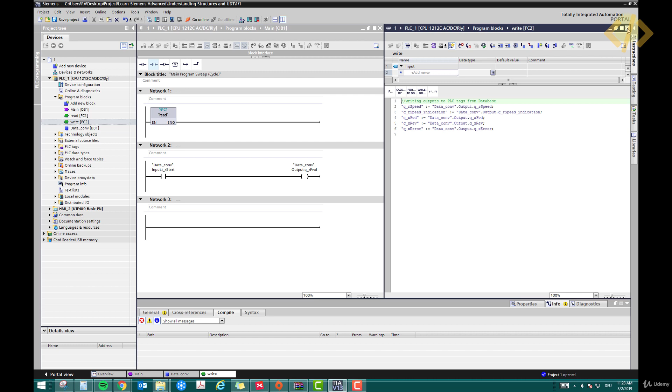So if I go to the read function inside, I don't need the write function because we are just reading it. Delete it and close it. Similarly for the write function, don't read the inputs, just delete these. So we have individual read and write. This one is just reading the data, and this one is writing the data.

So I will just drag this right here. Now this makes more sense. First we are reading the inputs, solving the logic, and writing the outputs.

All right, now coming back to our data conveyor DB. In this DB, I would like to add more information. We have written for inputs and outputs, but let's put some more information which would be quite interesting. So I will add a row and I will write here parameters.

And in the parameter, I will make it again a structure. Now what is this parameter? Okay, this should not be like this. Wait a second, because this becomes output. Hold on, let me delete this. And now, yeah, now it's better. Parameters, now it's a structure.

Now, what could be the parameters in a conveyor? It can be the motor on time, conveyor on time or off time, or it can be the speed. These are the three parameters which I see in the conveyor we have in FactoryIO. So I will start with on time, which is my input, and that's integer. So I will type 'on time'.

And the data type for on time, I would prefer to mention the on and off time in percentage. It would be in percentage, so I will take integer from 0 to 100. Similarly, we have off time in integer, so write off time, that's also an integer. And the third parameter I see could be the speed, that will also be in percentage. So again, integer. So all these three values are in percentage, so I prefer to take integer as a data type.

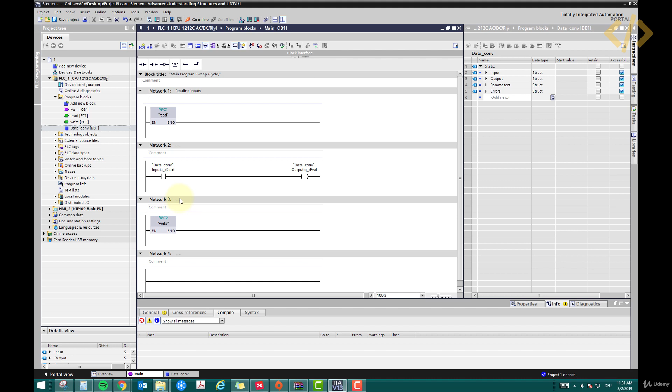Now one more thing we will do in this video. You can see that in the main program I have started writing the ladder logic in network 2. Let me just put some comments: reading inputs, writing outputs, and here is, let's say, the conveyor logic.

Now if I started writing here the conveyor logic for interlocking, for moving the speed, for showing the errors, it will be like so many ladders here, you know what I mean?

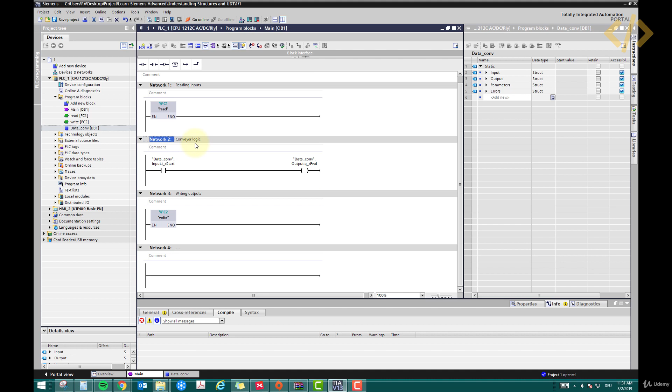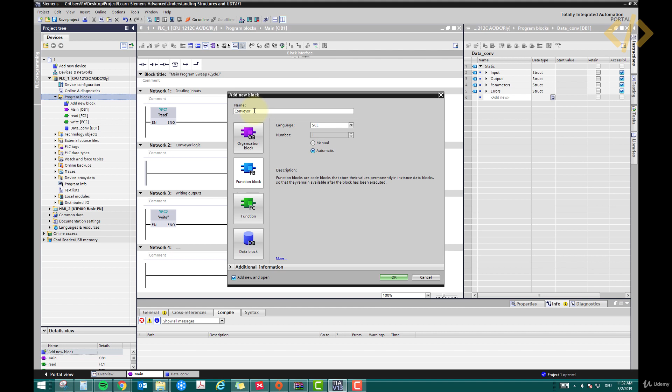So I want this network to be only for the conveyor logic, just to make clean programming. So instead of writing the logic here, I will make another function, or I can also make a functional block instead of a function. So I would prefer a new block, let's take a functional block.

This would be an extra block which we have only for conveyor, and let's try to program it in FBD. So I have conveyor FB here now. This I would like to move here. This I prefer for clean programming, because we know we are reading the inputs in the first network, we have logic in the second network, and then we are writing the outputs.

And now inside this DB you can do whatever you want. Sorry, inside the FB. So this is the FB. Here we can write the logic. All the logic which we write here will automatically be inside this one, and this will be executed after reading the inputs.

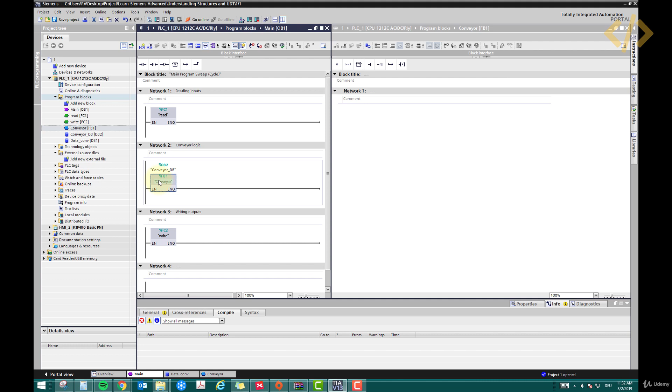Let's say we want to just make a demo. So I need to start my Factory IO. Suppose we just want to start and stop the conveyor using the start stop push buttons. So let me open the scene which I made already.

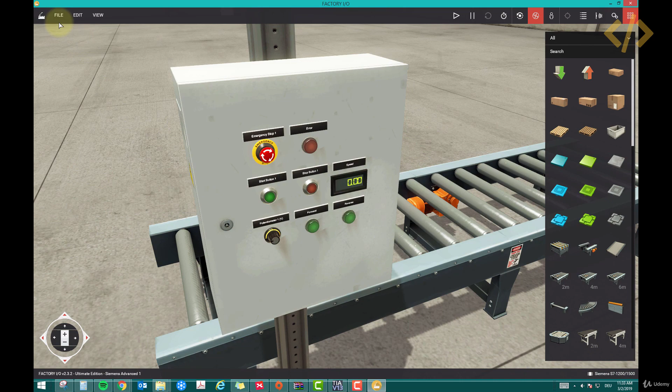Let me Google it, where is that? Academy, Siemens Advanced, somewhere, yep this one. So let me go back to the drivers. We have start button at I0.0, stop in here. Okay, this is the correct logic.

So now we open the DB again, because our inputs and outputs are here. One more thing, if you don't know, if you take an FB, it has a dedicated DB inside it. This comes automatically because FB stores the value and FC doesn't store the value. That's the reason FB has its own DB, FC does not have. So this DB comes automatically when you take an FB.

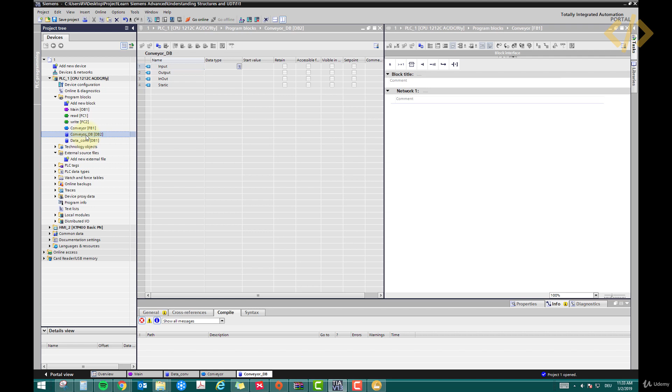But we will go to the conveyor data. So we need to latch the output. I will see what instructions I have, so let's just take an SR flip-flop.

Now what is going to set the output? My input, which is the start button. This is going to set my output, which comes here. In this case we have only analog control, so if you see here, it's forward, reverse, and error. These are the indicators, and we have the speed here in QD 100.

So what I'm going to do is I will take a memory bit, just for the sake of explanation, which can be called the start bit. So here, if you see the block in the input, I will take start bit.

Sorry, it is not the input, this is my static start bit, because this start bit I'm going to latch, and this start bit is going to move the speed into the conveyor. So I will explain how.

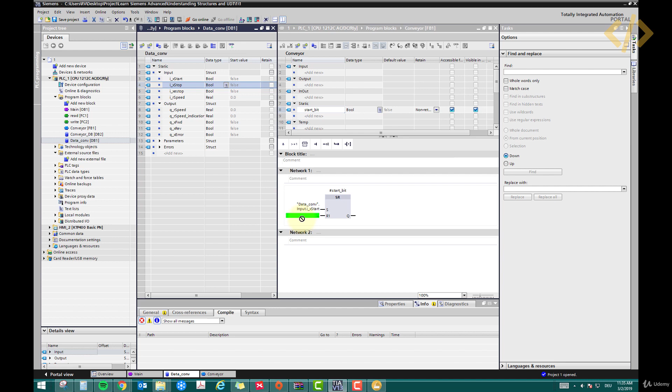So we have the start bit here, so I can take the start bit here. I latch the start bit which is in the static, and then I'll unlatch the start bit using stop. But we know that stop is an NC, which will always be on, so in that case I will take an inverse here. Let's check this logic and see if it makes sense to you.

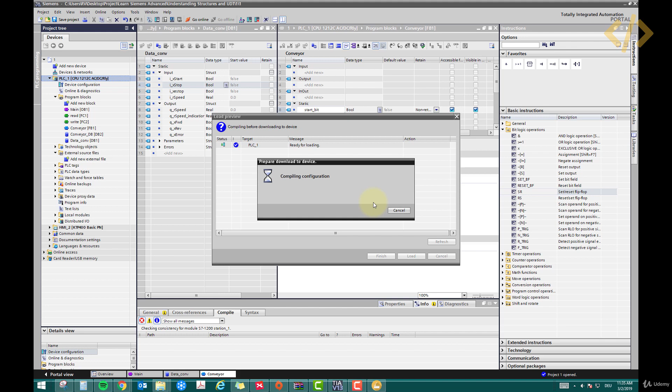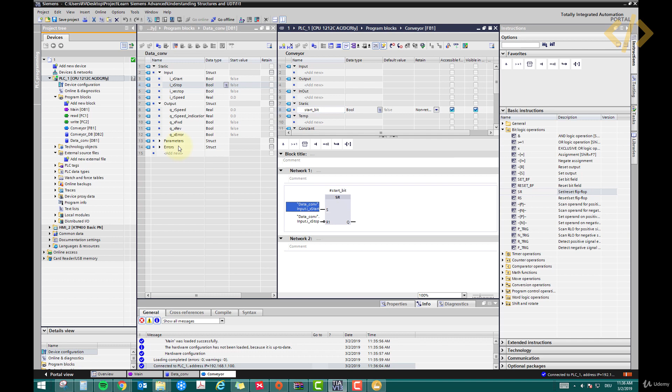So I will download hardware and software into my PLC, which will take a couple of seconds. Reinitialize and load. Now I will go online. No problem, I have to go to main, then go online, then go inside, then go online again. Okay, so we have this logic.

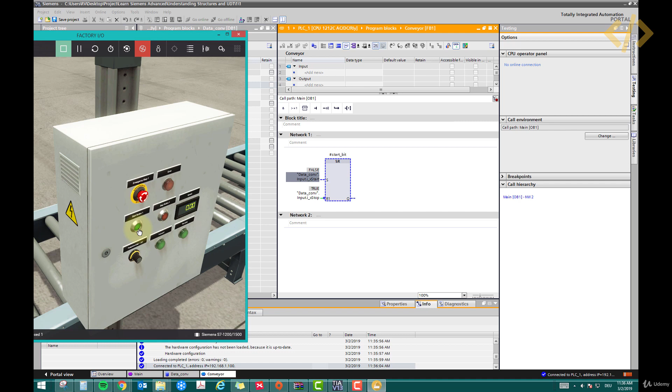Let's actuate it. So here I have my panel, so I press start. Let me see what's going on. Drivers. Start is I0.0, I did not connect it.

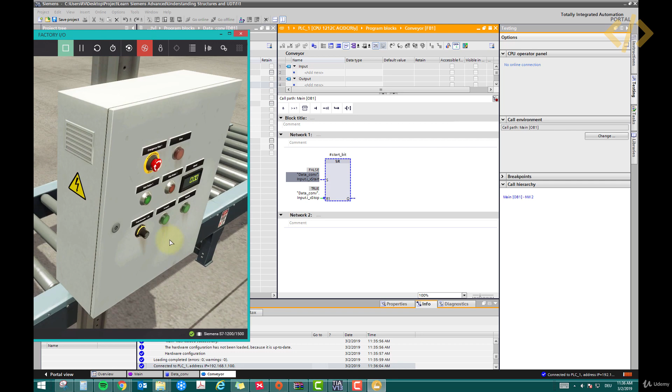Now it's connected, go back. Here again, okay so that's my panel. This will set my bit and this will reset my bit. But my conveyor is not running because the conveyor does not have the speed input. So this is start and that's stop. So you understand the latching.

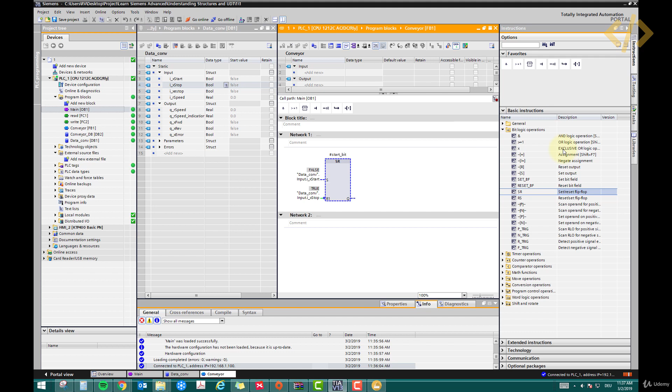Now using this bit, we are going to move the value. So we take an instruction and we take an AND operator. We don't need this one. So if the start bit is on, I will copy paste here. We need to move the value, and the value which we will move should be the speed. So we need a move instruction, so we have a move instruction here.

Now what are we moving, the speed, and what is the speed? Which should be defined in the parameters. So if I move the parameter here, this will go out to the belt conveyor. All right, now the belt conveyor QR speed is here.

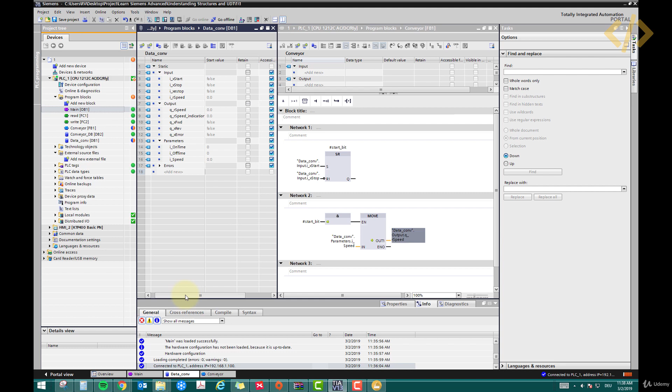Okay, wait, there is some problem. This one is in int, but I have to convert it into real, though I could also take it as real directly. We are talking about seconds here, so this should be in seconds, not percentage. Time should not be percentage, it should be in seconds. This one should also be in seconds, and speed should be in percentage. Okay, so now we have no errors.

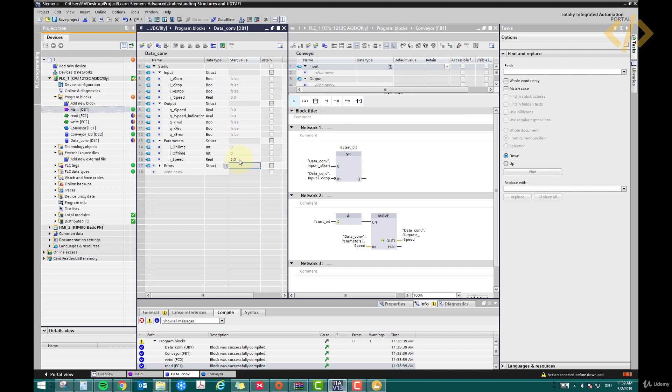Let's download the program. One more thing before downloading, hold on a second. In the parameter, you'll notice there is no start value, it's 0. So if I start the machine, there is no speed going inside the conveyor. So I can define the start value if I want. Let's take start value as 3.0. Okay, let it be like this. So now, when the program is at run mode, automatically 3.0 will be moved into the parameters, and the belt will run at 3.0 speed, which is 30%. Let's download the logic now.

Reinitializing the blocks. The logic is downloaded, and now you can see that this is 3.0 automatically.

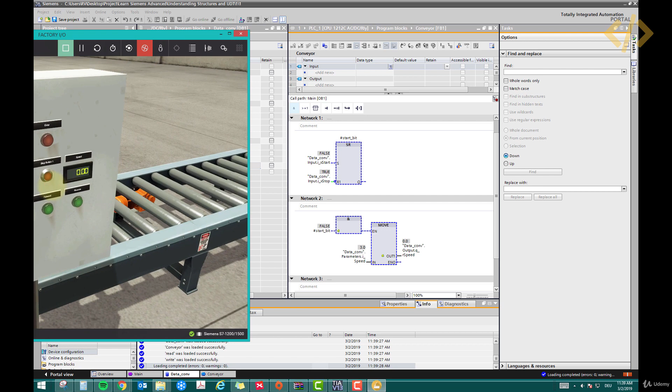And if I go back to my Factory IO, now we'll do the same thing. Start, and you can see that the belt is running, if you look closely, but it's running at speed 3.0 because this is what we have defined in the parameters.

Now if I go online here, this is the monitor value, 3.0. If I change this value to, let's say, 7.0, this will run at 70% speed, which is higher than 3.0.

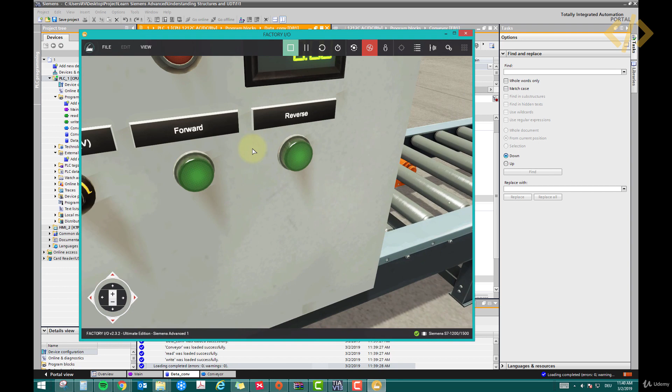So the idea is we have to change the speed from the speed parameters, which can be from any source. You can change this parameter from this potentiometer. You can also change it from your SCADA system, or from HMI, or from MES, doesn't matter, but we have defined speed parameters in the data block. That's the advantage of using a data block, because you can control it from any source, since the addressing of the data block is quite unique.

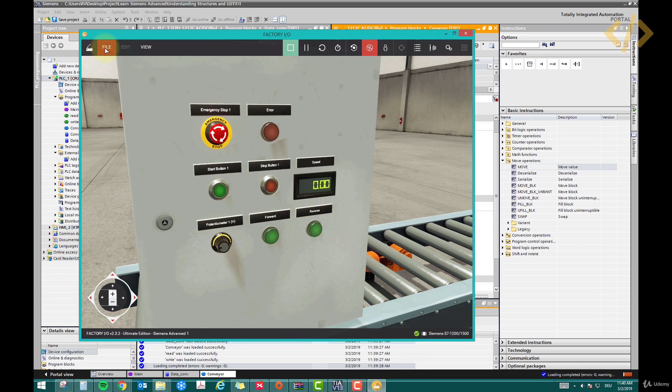If instead of the data block I just write here this input, which is my ID 100, dedicated to a potentiometer, then I cannot change the speed from any other source. So what I can do is move this ID 100 into this data block, in the speed parameters, and then control it from there.

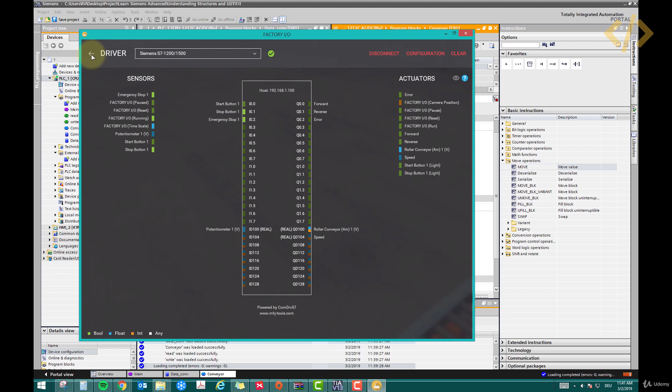Okay, since in this example we just have this potentiometer, let me go back. Oh, this is a software bug. Since I only have a potentiometer and not an HMI or SCADA, what I'm going to do now is move the value from this potentiometer into the parameters, and then we can control it. Let's do that.

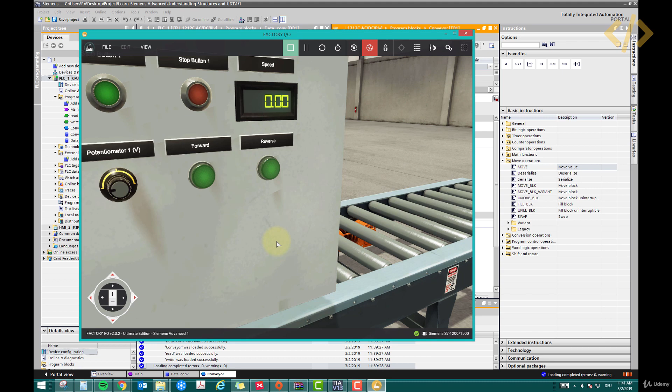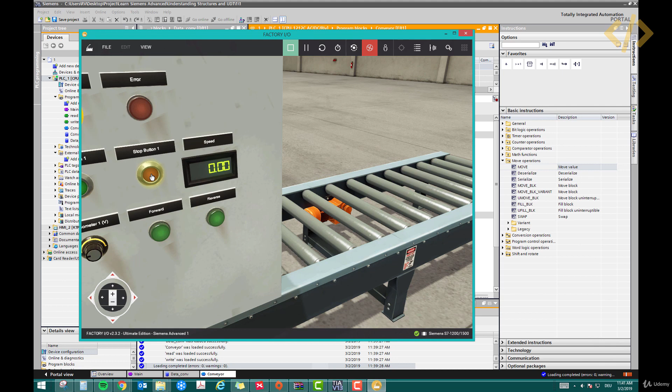So I will stop the conveyor. One more thing, there is incomplete programming. When the start bit is stop, let's do that here again. Okay, what's going on? Let me see if this is connected.

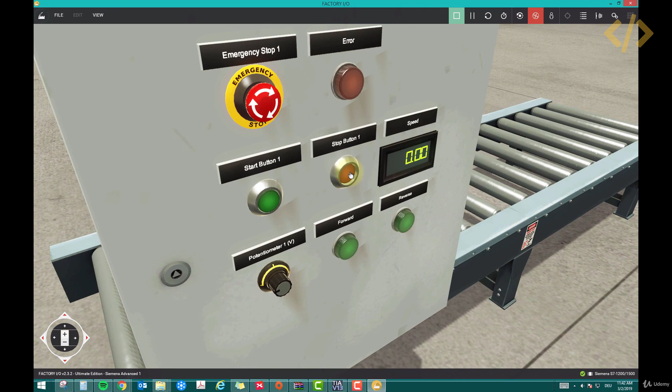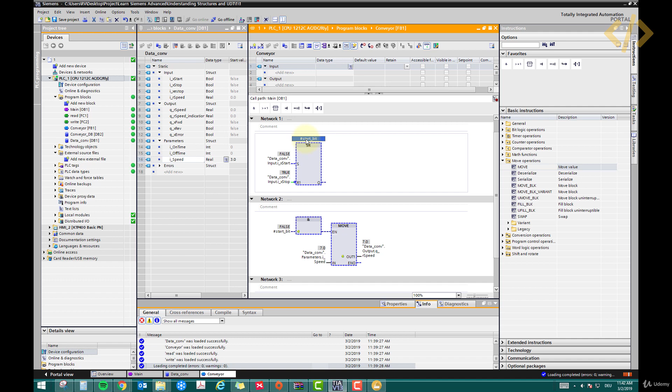Yeah, when the start bit is stop, you'll notice that the value has already been moved. In this case, when the start bit was true, 7.0 was moved inside, so the belt keeps running. So in the case when you press the stop button, this will go off, and when this is off, we have to move 0 inside the speed.

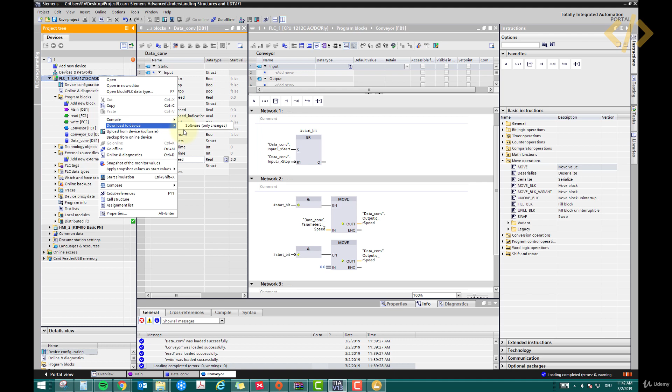So I have to make another logic, maybe here. We'll just copy this one. Now, when the start bit is off, I will move 0 here, and this will stop the conveyor. Because here we are moving the real value into the conveyor, we have to reset it. So now you can see the motor is off, and when I press start, the conveyor is running.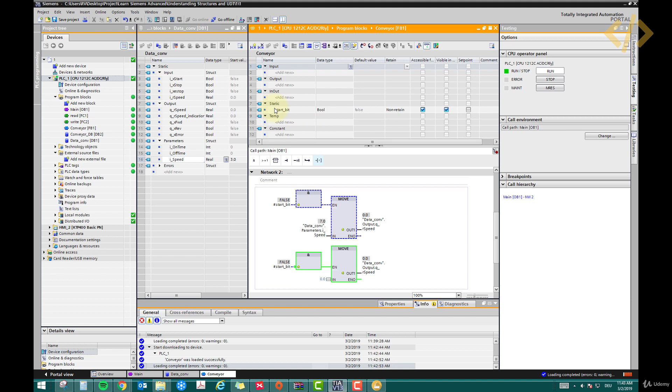It's running because 7.0 is moved, and if I stop, 0 is moved, and the conveyor stops. Okay, this isn't the case if your conveyor does not have a start bit. So we have made a start bit in our FB, and we are using this bit to move 7.0 or 0.0. This was the idea.

Okay, so next, in the next video I will show you, this is quite a big video, how to use this potentiometer and move the value from here to the parameter DB in a quite easy steps. So thank you for watching. See you in the next video.